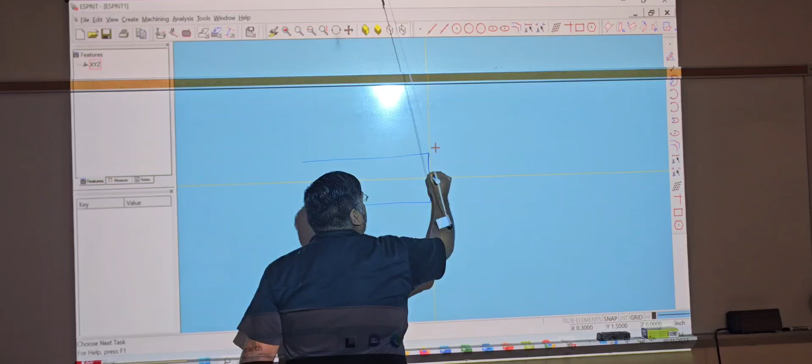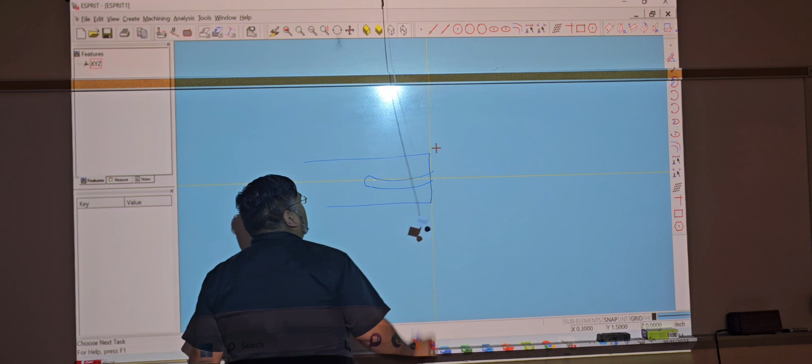A slot that has curvature to it - how would I do that? Would you just do a spline, to draw it out? And then how would you do it in ESPRIT?

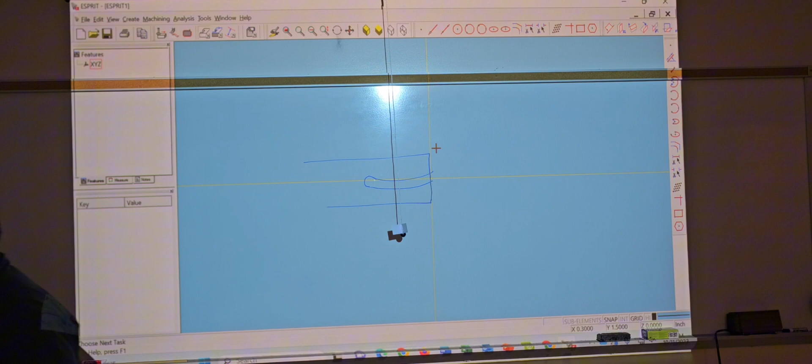You have no spline. And we know who loves SolidWorks over here. I know who loves SolidWorks. Alright, so would you make it like a 2-point circle, or yeah, 3-point circle?

So try to do it on your own right now, everybody. Use your mind, but try to get it done.

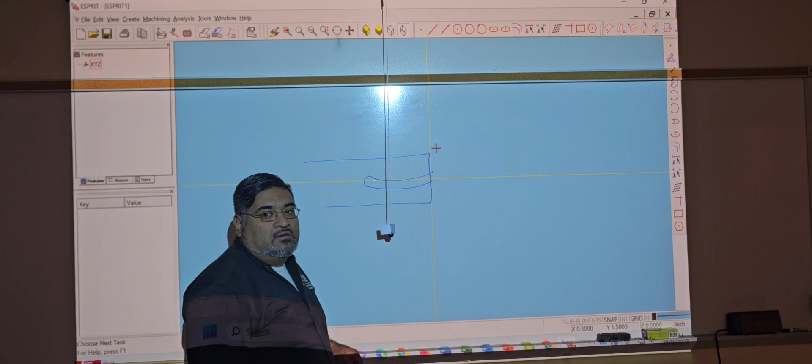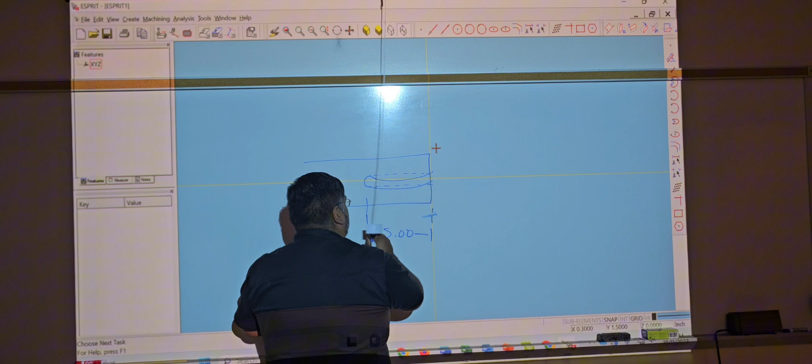So the same way as we did the straight ones - this is an example of the straight ones. But do this one, so we'll just give it some bogus numbers. We're gonna go over here, I don't know, 5 inches from there. And then this is just gonna be .125 radius.

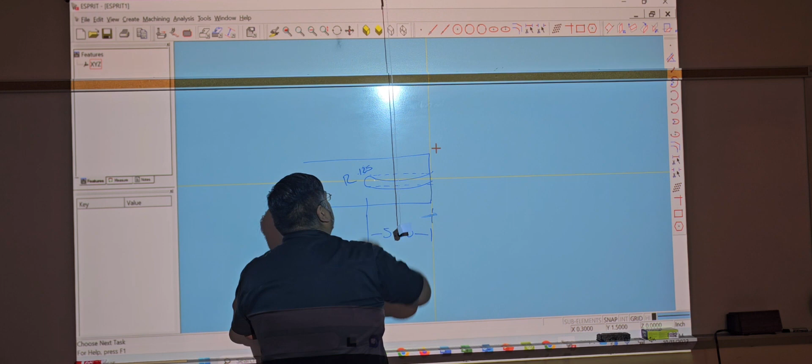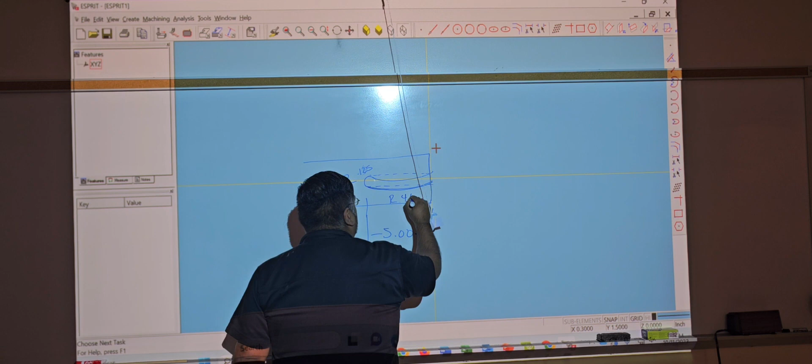Is that enough information for you guys? Is it? Oh no. So this radius down here is gonna be, let's try 4. I'll try it out and switch it if it doesn't work. Alright, so this radius.

Alright, so like I said guys earlier, for your test it would be better if you make your extra axes and everything from the get-go, right? A setup is called a setup for a reason - you're setting it up, correct?

So it would be a lot better if you go ahead and take it to SolidWorks, and then come up here to setup. Go to assembly, table, axes, new axis. Remember guys, it has to say rotary on there - there's only one axis, has to say rotary. Hit OK, then come to your solid.

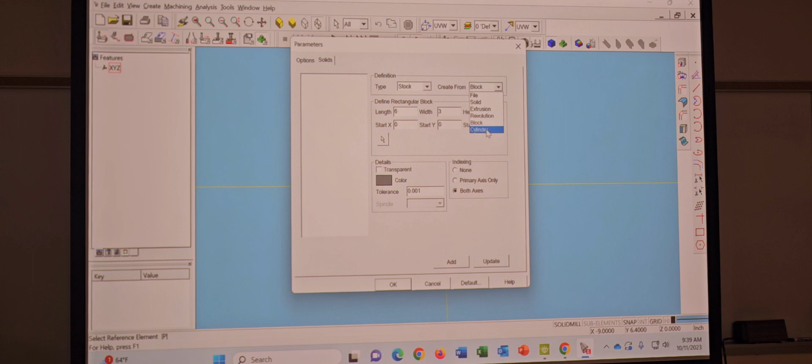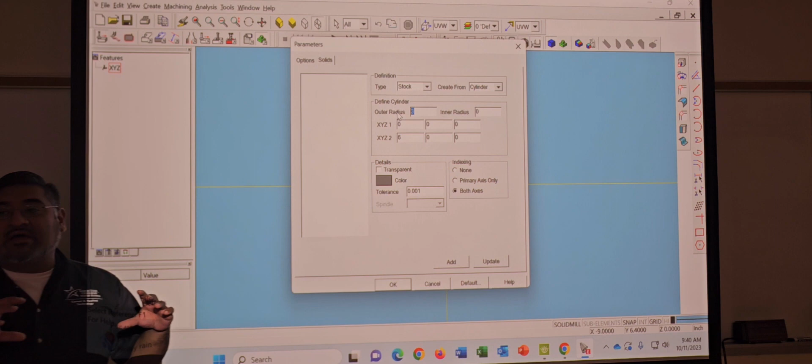So here on your solid, I'm gonna make a stock and I'm gonna make it from a cylinder. For your test, you're gonna have an inner radius - that's how you make a pipe going through it. We know that when you machine at a shop sometimes there's already an ID hole through there, or it's already round stock inside. So that's how we would do it here in ESPRIT for the solid.

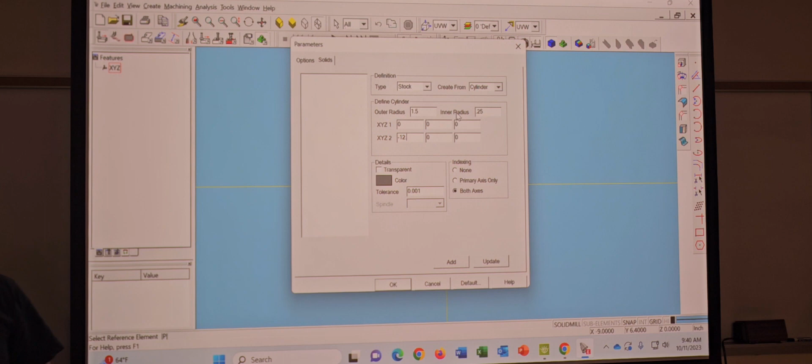So my radius is gonna be 1.5. I believe the inner hole is gonna be 1/2 inch, so we're gonna put the radius of 0.25. And then our X, we're gonna go -12. So that's all we needed here - that inner radius is for the small hole, and then the outer radius is gonna be for the OD. This is self-explanatory, hit add, hit OK.

So now when I push pause, see, I can see through there. Oh, there's a little hole. Alright, so now I'm gonna make my part.

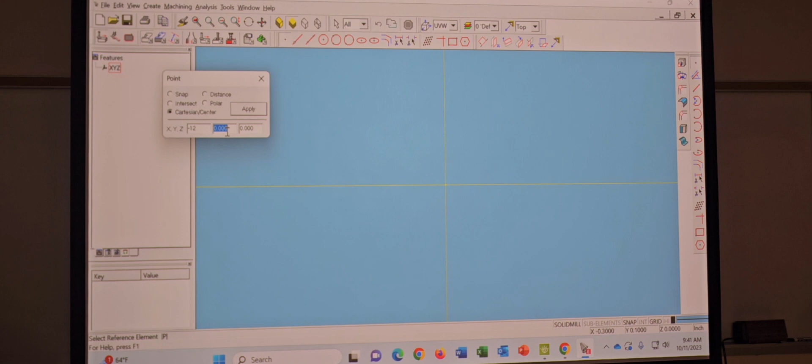So I'm gonna go to unbounded geometry, make my point. Go ahead and just make that to -12, and on my Y I'm just gonna put it up to 1.5. Hit enter.

Where'd it go? There it goes - you gotta back out. Yeah, see, that's why I like SolidWorks, it already brings it in, it zooms it in. So I'm gonna click it, I'm gonna bring it over here.

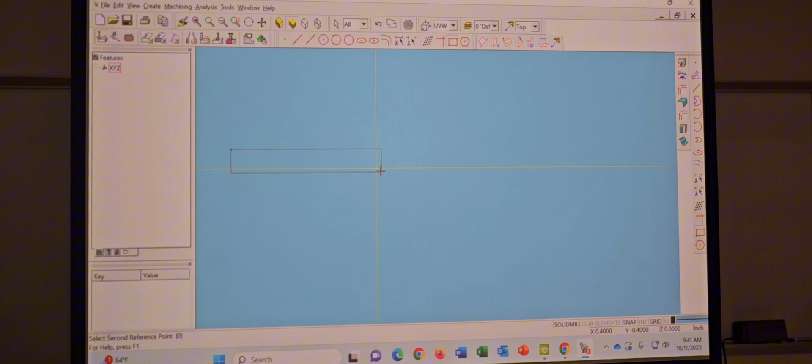Now, like I said guys, you don't have to put your layers on there, but it is a whole lot better in essence for controlling your actual drawing and everything.

So I'm gonna hit new, and I'm gonna put Geo. I'm gonna hit new, and I'm gonna put part solid. So I'm just gonna take this back, instead of being default, Geo. And I'm gonna go ahead and turn on my hot pink.

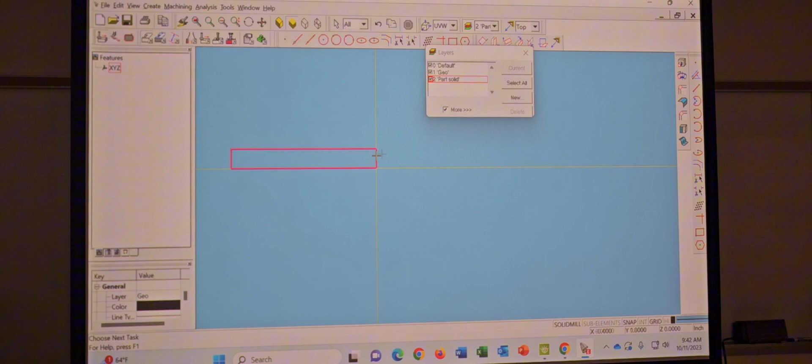So now if I hit shift and on there, and then it's gonna be the part solid, so I'm gonna be revolve. Remember, as a default, 90 comes up there - we have to remember to change it to 360 degrees. Then we click down here to select my axis, so I'm gonna select this one. Boom, there goes my part.

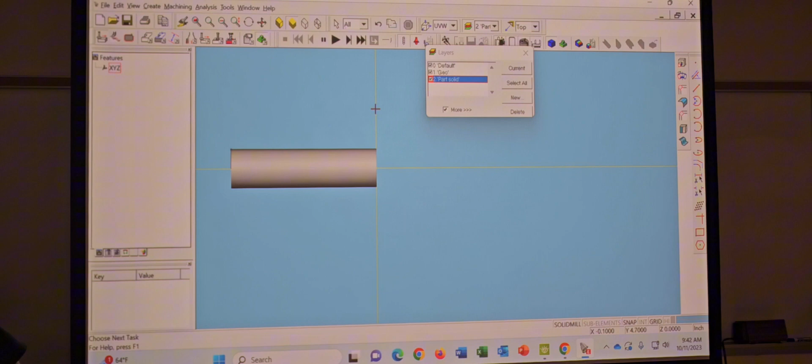So now if I push pause, it's lined up perfectly right on top of it, correct? Alright, so now I'm just gonna turn off my solid and I'm gonna make a point on 0,0, so it makes it right at the center.

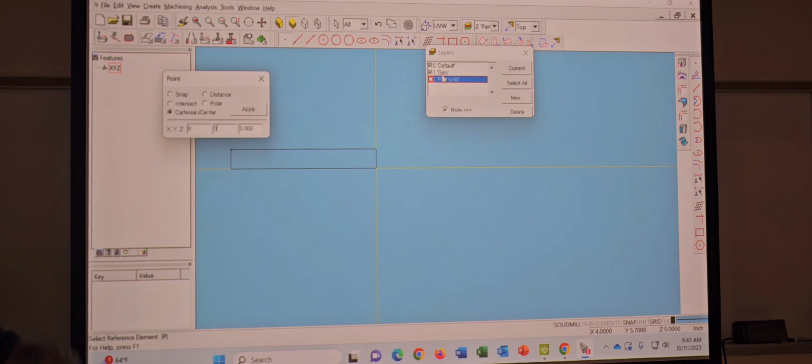Now remember, if I would push enter right now, I'm not gonna see anything. Why? Because my part solid's highlighted and it's not checked, correct? So I'm gonna take it back to Geo. Now I'm gonna hit apply, boom, there it goes, right?

And this one's gonna be negative 5, enter. Negative 5. So now I'm gonna make my circles.

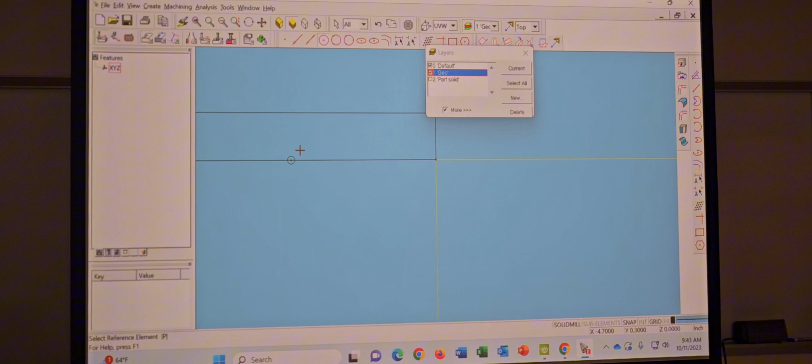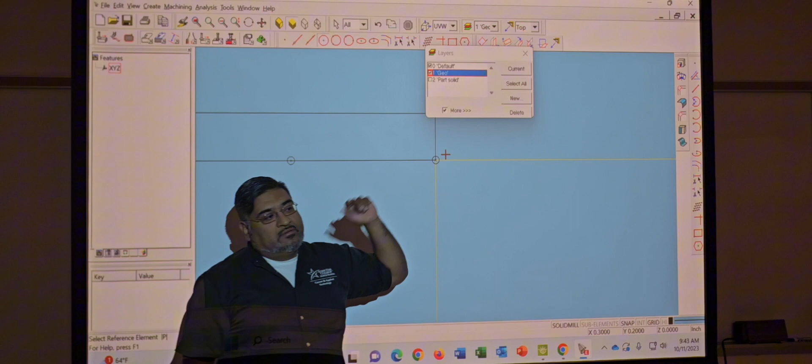So this one, the radius was 0.125, and then make this one also 0.125. When I was walking around, I saw some of you guys weren't making both circles. Y'all just made a point, and y'all were taking the circle to that point. Wrong answer, correct? That's what I did. Make both of the circles.

Now I'm gonna go to circle 2. Click on this side, and then click on that side. I did the center to center. Circle 2. See? And now you can't even see it. Alright, there we go.

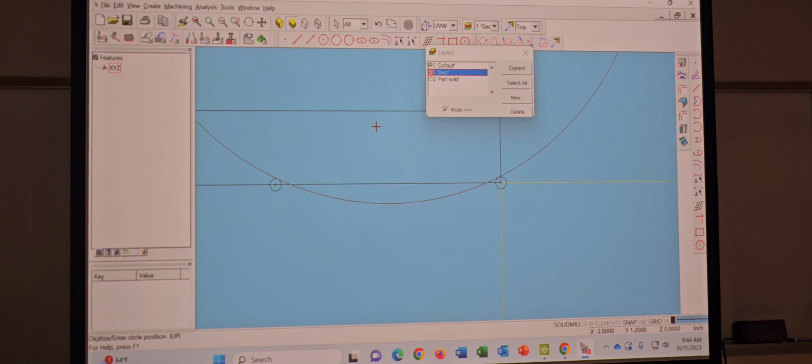How much was that, 6 inches? So 6, enter, this side, and it made that one, right? So at the bottom, click that one and that one again, because I'm still in circle 2. Hit 6 again, enter. I did mine the harder way.

But it's not better, there's multiple ways to do the same thing. There's multiple ways, guys, whatever floats your boat. Actually, it took care of the problem with that mushroom shape or whatever you were getting on that circle. The way we did it, that's obviously better. The way we were doing it before, it was giving us a crappy end. It still works, but yeah.

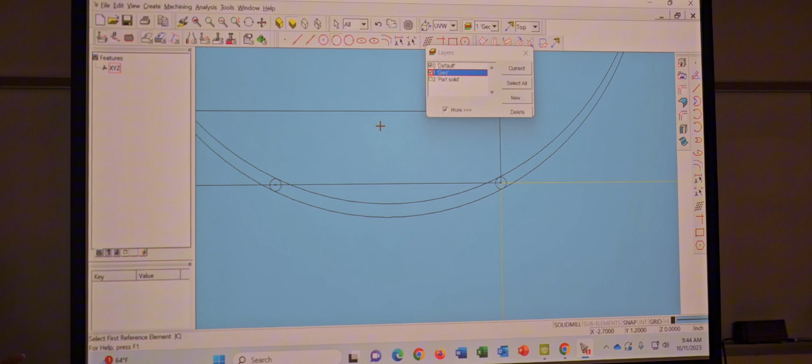Alright, so now I'm just gonna trim off the things I don't need. So I'm gonna trim all this in here. That guy too. And then no more.

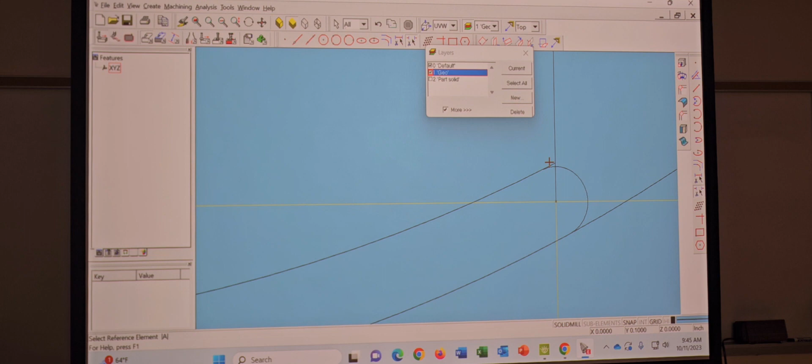Alright, so notice that I trimmed off everything that touched this. Because if I hit shift and click that line, if that line was connected, it would carry through with that line, correct? See? So now I'm just gonna push escape to get out of trim.

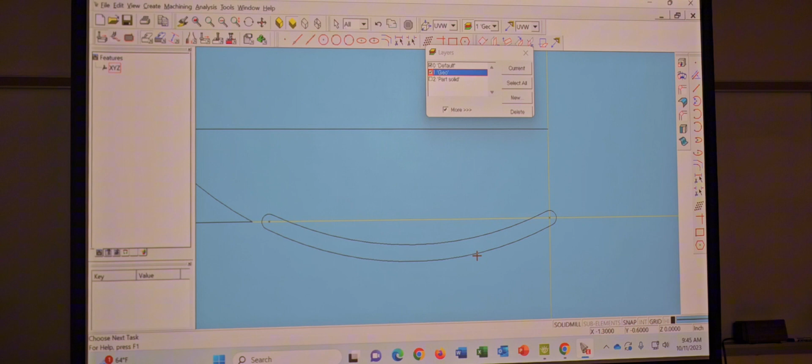Shift, highlight the whole thing. Copy, translate it. We're gonna move it 1.5 on the Z, right? 1.5 Z. So it's still highlighted.

So now I'm gonna rotate it. Copy, rotate, I'm gonna copy it 3 times, uncheck original. Couldn't you do what we were doing yesterday and run that toolpath first and then do the copy? No, well, yes and no. But this, I was gonna teach you guys multiple ways of doing this.

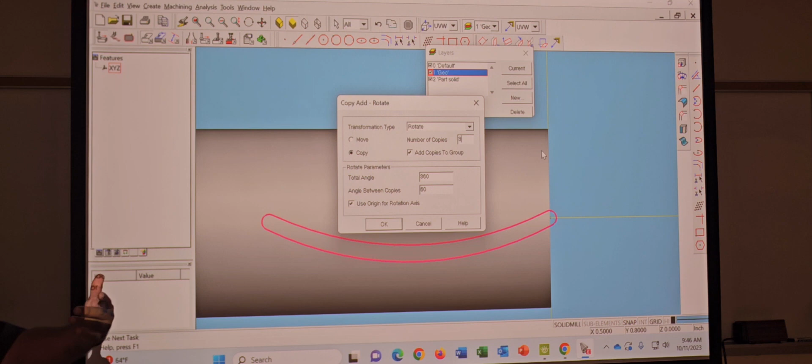So could we have used that way for the test? Yeah, okay, so you could have just had this and then rotate the screen and the toolpath, and it would have been the same thing. But if I do that, it's not gonna show me the actual cut extrude on it. And then plus, if you try to do it like this right now, that's closed, it's a pocket, not a contouring, because it's still closed, correct? So I'm gonna unclick that, hit OK.

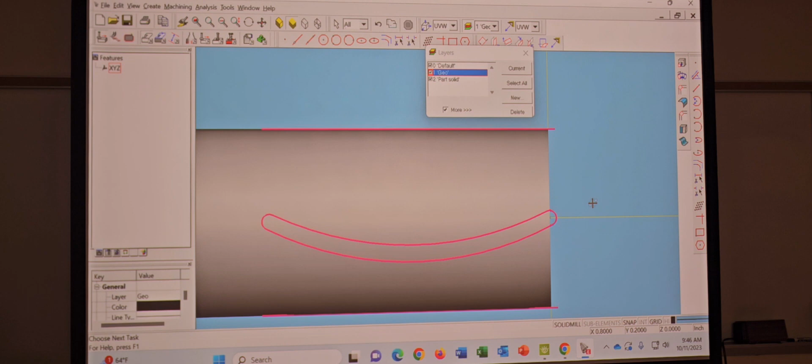See how we got them on now? So now I gotta just click anywhere, so they're not highlighted. And I'm gonna hit shift, click that one, extrude it down.

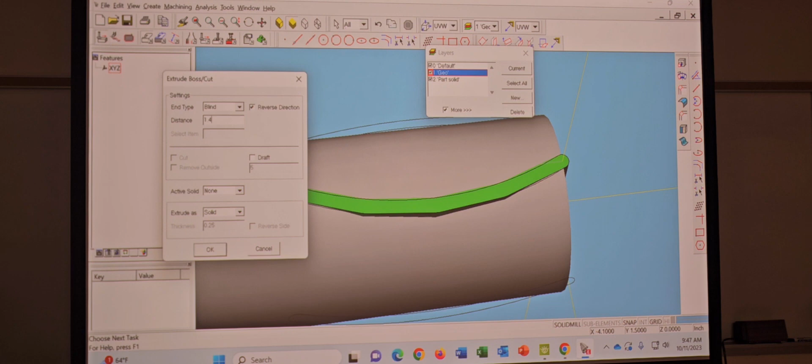We could go 1.5, I could go 1 point- no, yeah, but it has the through hole, remember, of a half inch also. So I could go 1.3, 1.4, whatever's on there. We'll just go 1.5. It's just gonna leave like, it's gonna look like in the center, a little undercut in the face of it, if I put it on there.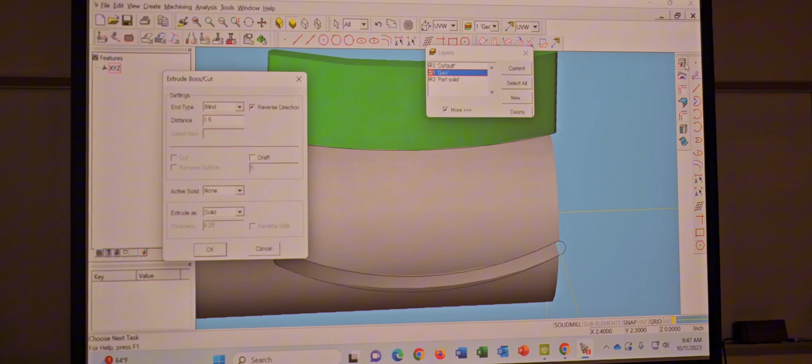So I'm just gonna hit body 1, cut, hit OK. So now my drawing actually shows the actual cut. So hit shift, click that one, same thing. That one's going up, but we're gonna take it down. Body 1, cut, hit OK.

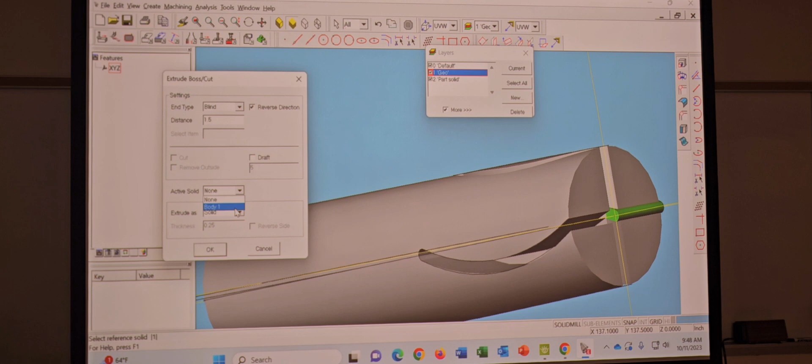Nice circles. Same thing with this one. Cut extrude, it's going down. Body 1, cut, OK. And same thing for the last one, which is back here. Shift, highlight it, it's going the opposite way. Body 1, cut, OK. Boom. So now we have all of them done.

So now what I'm gonna do is, I don't like all these extra lines, I don't like everything on there. So I'm gonna turn off my solid, and I'm gonna highlight all this.

Delete it, right? Take it all off because we don't need any of that right now. I'm gonna open up my part solid again now, and I'm gonna hit F7.

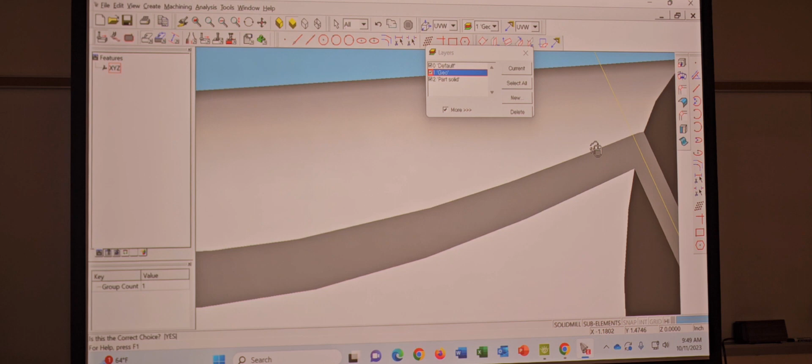So it comes to the first one. Now I'm gonna turn on sub elements and high. I could zoom in and click the actual edges of it. With control down, I'm selecting all of them - that's the one I want, that's the whole chain I want. Now come back over here, auto, boom. I made my chain now.

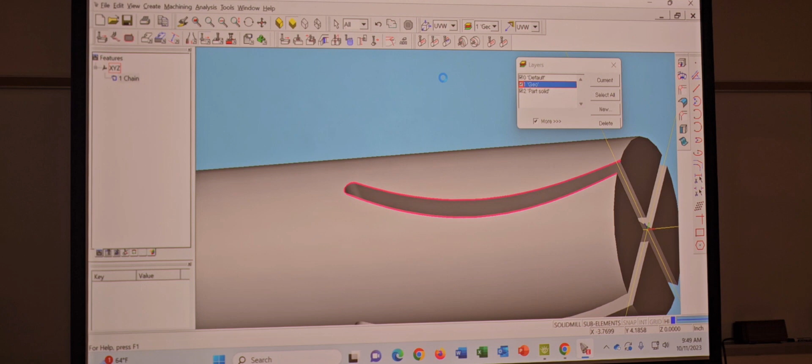125, yeah. So the 0.2 will still make it. All this wrap feature, yes, 3 inches in diameter. Radial strategy, my total depth I want to go down to 1.5, correct? Gotta come to the left because it's coming from here. Under advanced I can leave that the way it is. Under links, normal and tangent or tangent will work on this one.

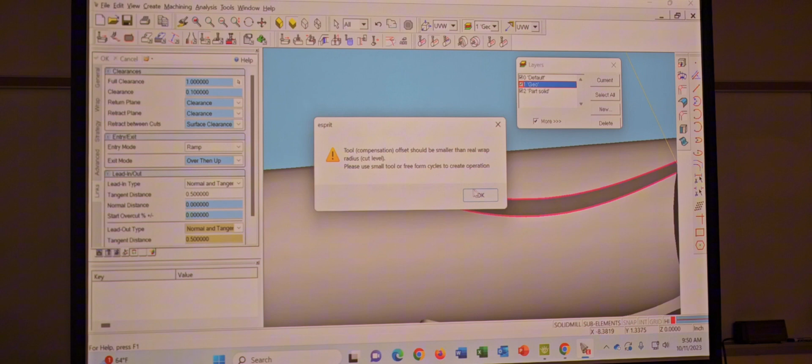So then when I hit OK... hold on. Tool comp has to be - man, we had this problem yesterday too, right? Quarter inch. See, it gave us this issue.

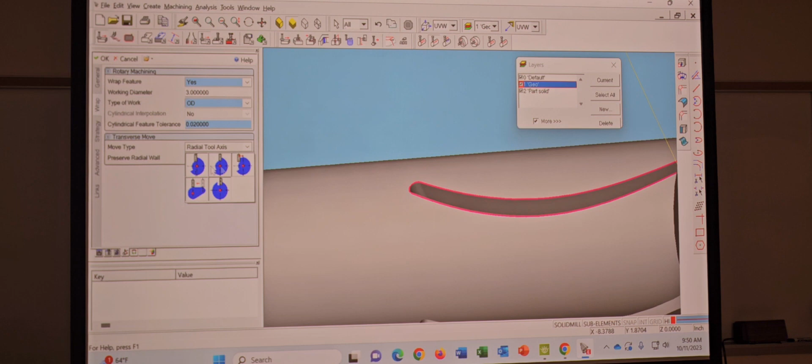Why? Which was okay, I'm going. It is going to my left. You're doing the wrap contour? Mm-hmm. Why? Because it worked earlier, when it did it. Because if I just do contouring, yeah, it would accept it, but I wanted to do the wrap one. It accepted it earlier with no problem.

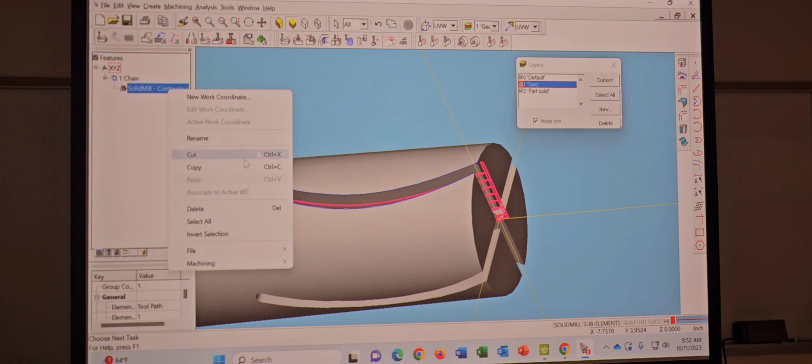Let me just try the contouring, which I'm pretty sure is gonna work. But I did do wrap contouring earlier. So yeah, that contouring is there now. And then like we said earlier, we could just right click, highlight it, right click, go to copy, rotate, everything else the same. Hit OK, click the point, the origin. There you go, boom. Alright, so now it has it.

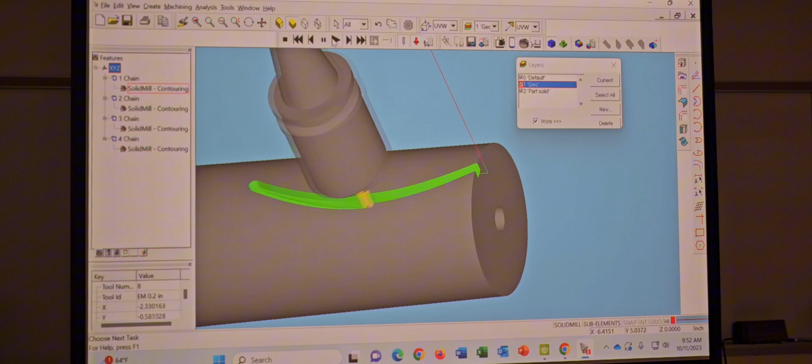Since I know I'm going 1.5, I gotta take at least a little bit over 1.5. So I'm just gonna go 1.7. I just made mine two inches.

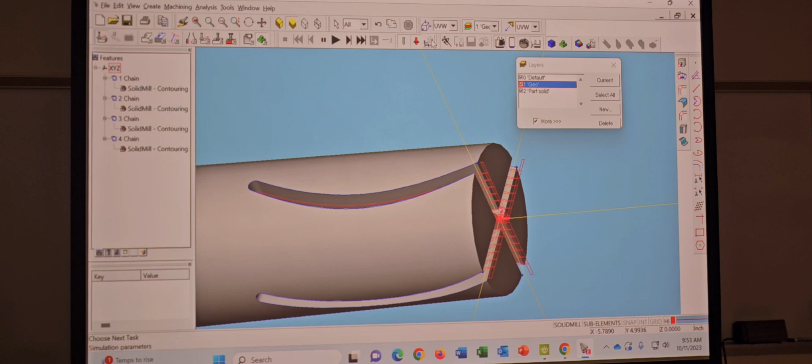Hey, okay, can you go to parameters real quick? On which one? Parameters, just next to the tool holder. Click parameters, I need to see that, cause my numbers are jacked. Okay, alright, thanks.

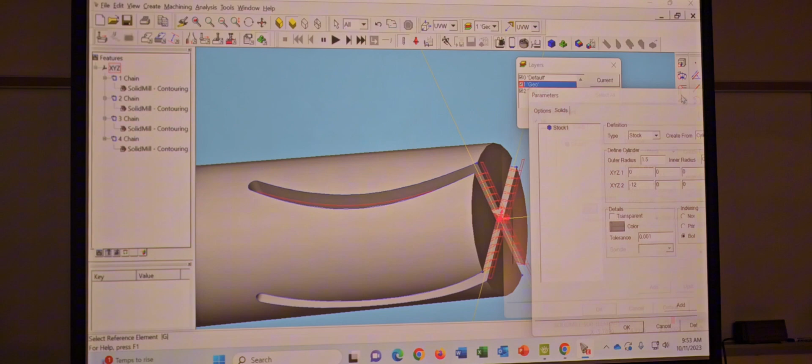Alright, so now if I play it, that's just the tool - there's the holder, and it's gonna do it. There we go. Just gotta figure that out now. And that's here, 1.5, and I'm still hitting.

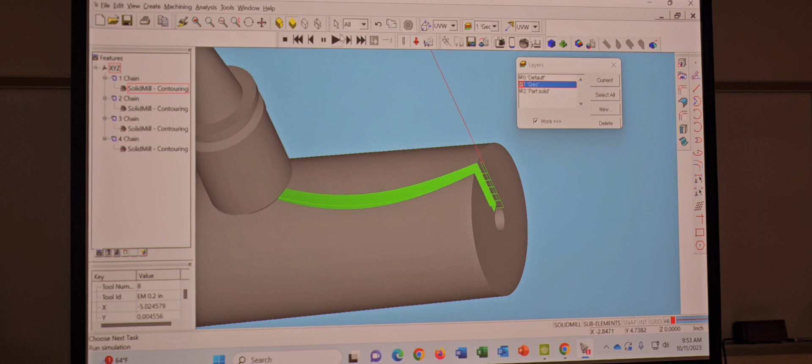How do you know it's hitting? Oh, now you know - I think I put the wrong tool in. So that's the 0.2 end mill. I picked the wrong one.

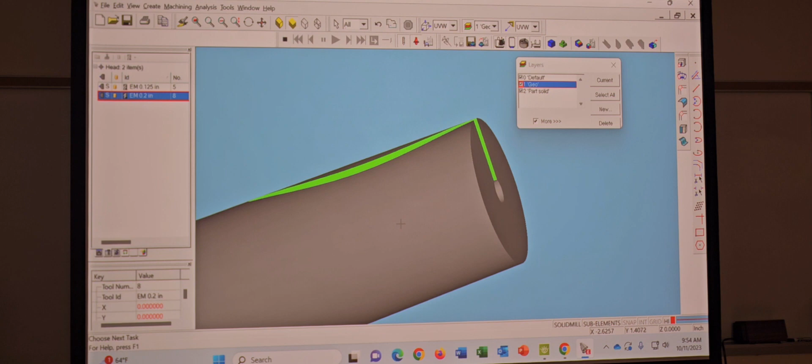Alright, y'all good? Understand how to do it now? Oh, cause I made a new one. No, I didn't change it. Okay, so I guess I just did it the last time. But that's the change in everything for it - coming from the front, going back.

And yeah, it's gonna go this slow, guys. I have it at the fastest speed, but just think about all the code that it's generating to do all this, right? That's why it's going so slow.

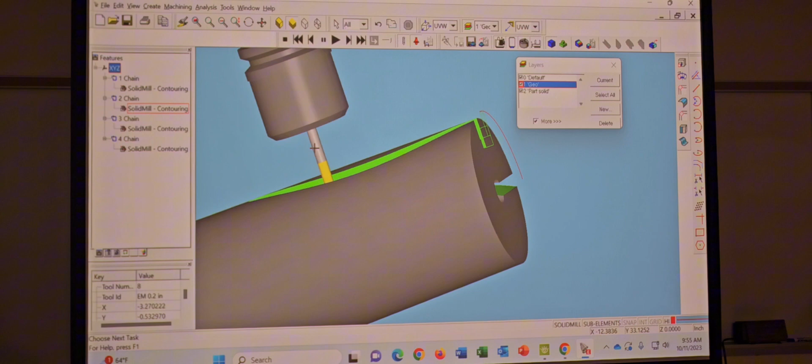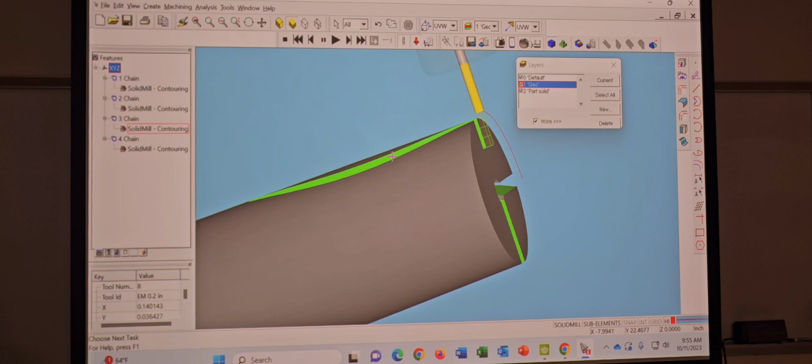Yeah, so just do the contouring on this one. I think we wanted that hole bigger. Not even that, I don't think it matters. Yeah, a little bit bigger. I don't know, mine's cutting above the part, not into the part. See how there's that little tick in there - yeah, that's what I said, it's gonna have that little tick.

What do we have it, half inch? So maybe 3/4? Yeah, I think it's gonna leave it there regardless because it's the cutting path of it. The only way to get out of it is if you actually put a chamfer on ID, then it'll definitely eliminate it.

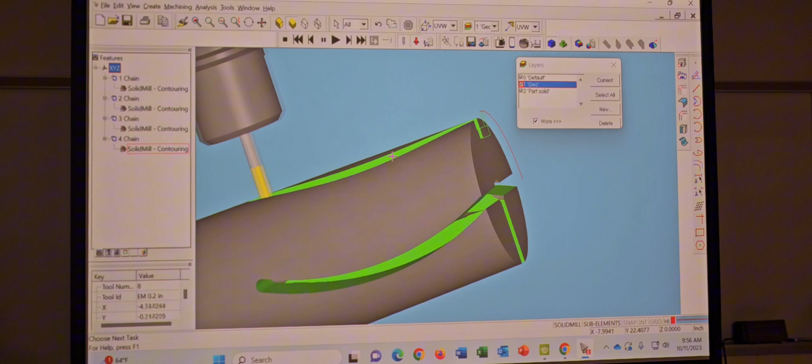Alright, everybody good? You know what you have to do? No.